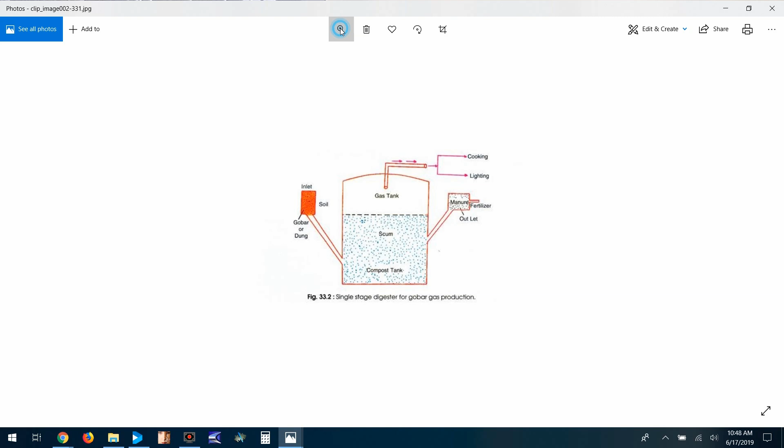All we're worried about here is the effluent that comes out of the toilet into the biodigester. So one of the things I did was, when researching, I was looking at how these things would go. Let's zoom this up a little bit.

So you see here we've got the inlet where all the little turds come down into the tank, and then they come out at this end, and you've got fertilizer at your outlet. Inside you have your composting tank, the scum, and the gas collected at the top - that's the methane.

The thing about this particular design with the single stage is that when this effluent goes into this pipe, it's pushed in, and once it gets moving it continues across this way. What happens here is this pipe is pushed out, and when everything is pushing out this way, it's drawing from the tank - so as it's pushing in here, it's pulling out here.

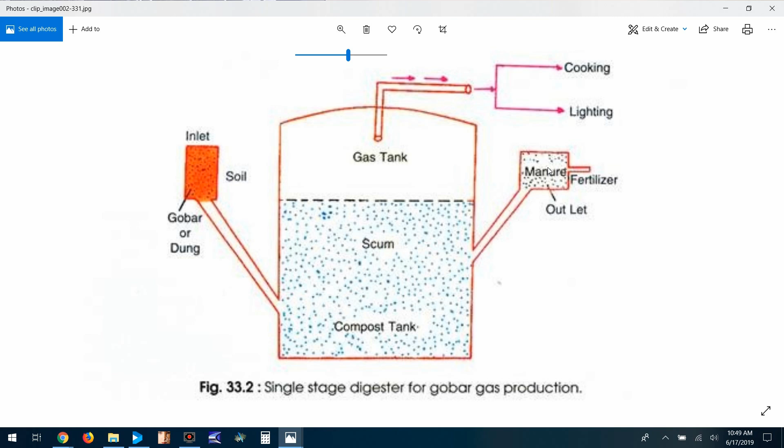The problem I have with this is that I think some not-completely-digested fecal matter could actually find its way to the end. Well, what they did to fix that in one design was...

Let me see if I can find it here - this guy right here. Okay, so this one has your inlet pipe that goes into the bottom, and then you have a baffle in the middle, this partition wall right here. So it has to go in, up, over, and then back down and out of this outlet pit.

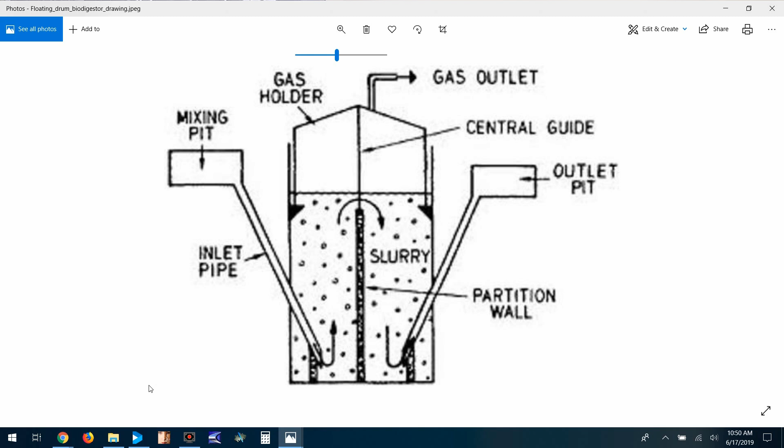So with this going on, there's not as much of a chance of the fecal material getting from the inlet to the outlet as directly as it would with the single stage biodigester.

Then there was another one they tried in this next set here - they've got this biodigester where the effluent goes in and comes out just like all the others, but then you have this stirrer that would either be operated manually or could have a motor up here that would just mix all this stuff up.

Well, you're mixing the old with the new, so in my opinion you could still have some of the new effluent - basically fresh turds coming straight out - into your outlet, and there could be some pathogens with that.

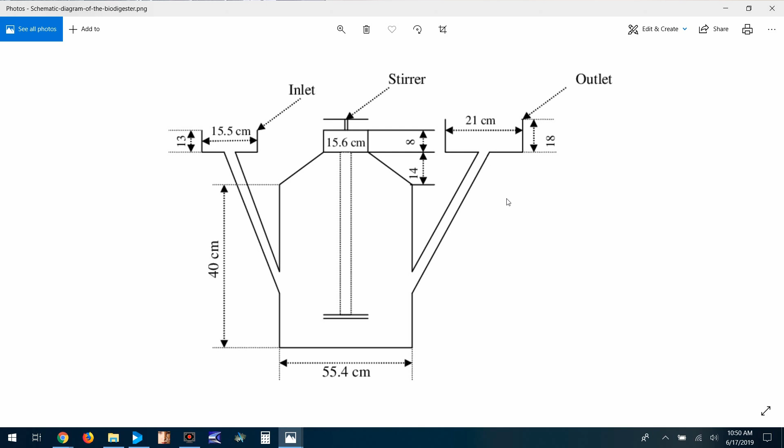I don't like that. And finally, we've got this last one here that I believe a municipality hired an engineering company to build. This, I think, was like a polyethylene kind of tank. They put it on a concrete pad with a heat exchanger that heated up all this effluent so it would make the gas faster.

So they would pour the manure into the reception pit, the pump would turn on and force it into this thing, and then they'd have these two little propellers on either side, which were mixers, and the effluent would come in here and just sort of swirl around and not necessarily make its way to the outlet of the tank.

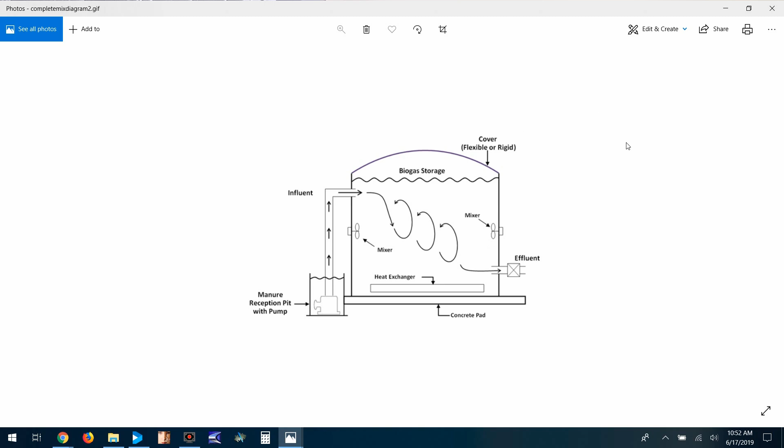Now, what I don't like about this either is it's using electricity for the pump and it's using electricity for the mixers, and when these mixers break down and have to be replaced or repaired, that I don't want to be the one climbing in the tank, and whoever does it's probably going to charge a lot of money. So I kind of just started moving away from that kind of thinking altogether.

So I got to thinking, you know, the human intestines is probably the best example of methane production, because you eat and all of that organic material, food as you want to call it, travels through your intestines, then our intestines extract the nutrients out of all of that food as it's passing through, and we generate methane gas, which is good old smelly farts, and then of course you have your effluent that exits out the end, but it's not completely digested because our body only needs to have it in the intestines long enough to pull the nutrients out. The goal is not to completely digest all that fecal material.

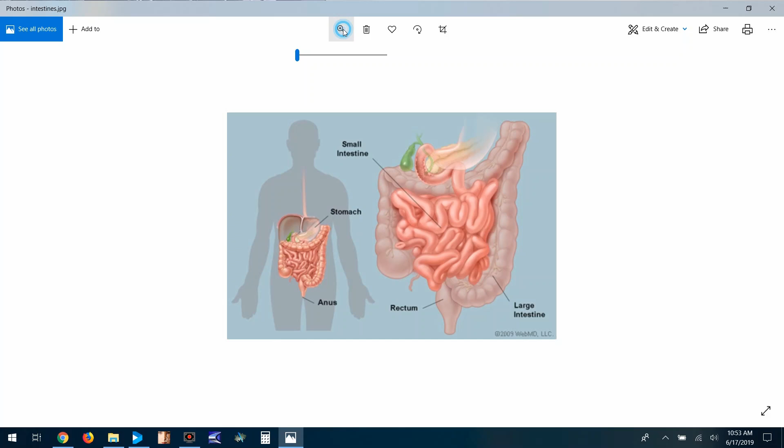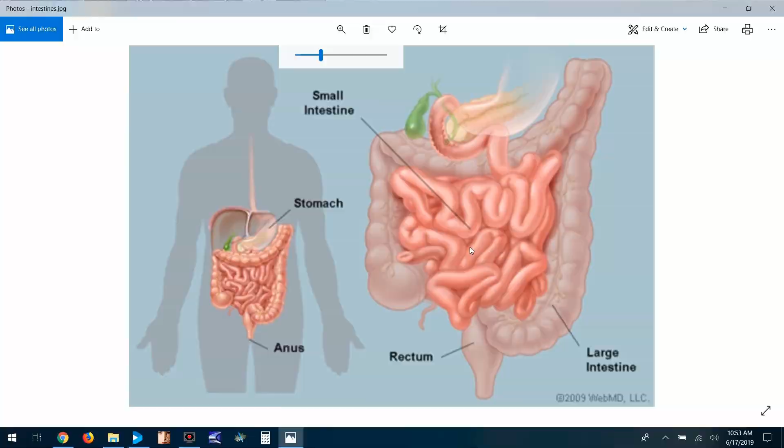So if we look at our intestines here, this is kind of what we have. We got the stomach, and it comes in and it goes through and just squiggles all around in all these different directions here, and then finally goes out the rectum. So it's a pretty efficient biodigester. It's just that the organic material doesn't stay in there long enough to get totally digested.

So I got to thinking, well, I could take some pipe and make basically an intestine that just sort of zigzags around on the ground there and let that fill up. So what I needed to do at this point was do a little bit of research.

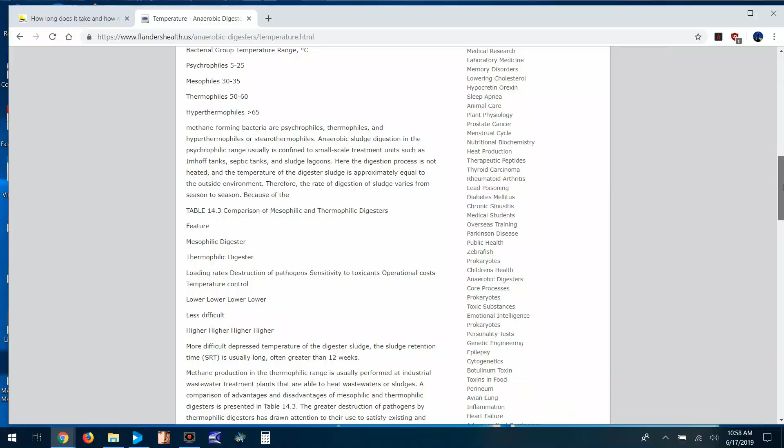So anyways, we're going to be looking at using the psychrophiles bacteria to process our waste into methane. So right here it says the more difficult depressed temperature of the biodigester sludge, the sludge retention time is usually long, often greater than 12 weeks.

Well, 12 weeks, that's, let's see here. We've got 1 gallon per day, so that's 7 gallons a week, and 7 times 12 is 84 gallons that my biodigester would need to hold to operate at a minimum of 12 weeks for 4 flushes.

Now, more realistically, we're probably going to be doing more like, I would guess, more like 3/4 of a gallon, probably closer to 3 flushes a day, because we really don't depress the pedal for very long to flush.

Okay, so I got this pipe volume calculator, and at first I thought I could probably do all this with 3-inch or maybe 4-inch pipe. But when I realized how much it was going to take of the 3-inch pipe, it was way outside the scope of reasonability. So I moved up to 4-inch, and it wasn't any better. I finally went to 6-inch because Home Depot sells the 6-inch pipe, and a 6-inch diameter, 10-foot long pipe will hold a little over 14.5 gallons.

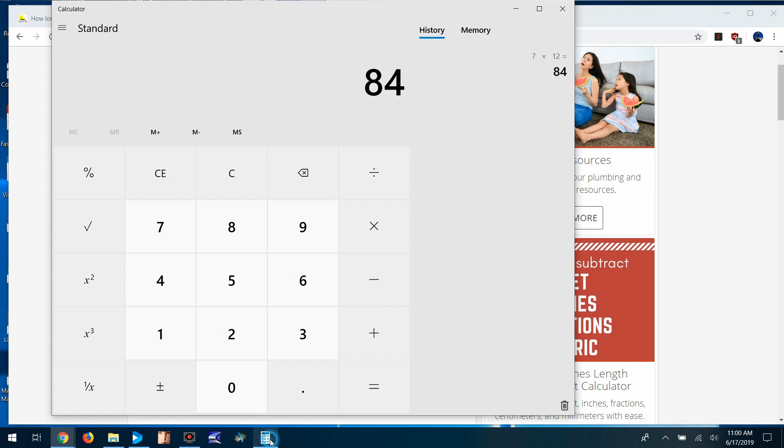So if I go back to my calculator, I can do 14.5 times, and I've got actually 11 sections of pipe out there, which is 160 gallons easy, because I've still got the elbows in it, the stack, and all this other stuff. So I'm easily at twice what I need in order to properly and fully digest fecal material.

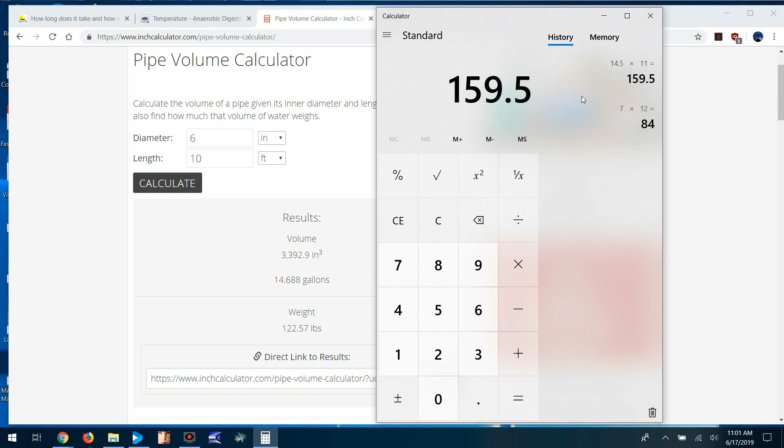There's a lot of other things that need to be taken into consideration with biodigesters, like if you fill them with too much water - if you do laundry or whatever and use it for all your sewage, you get what's called hydraulic saturation, or basically waterlogged. They like using these big words in these papers, but the simple man's term is it just gets waterlogged. There's so much water in there that everything gets so diluted it can't process well. My system is a lot more concentrated, with a lot less water and more of the fecal material actually in the piping of the biodigester.

Other things you have to take into consideration is the pH of the biodigester. You got to watch it a little bit because over time the biodigester will start to acidify, and you might have to add just a little touch of borax or baking soda or something like that. But as long as you keep it fed with other organic material like toilet paper, cuttings from the kitchen, any kitchen scraps - that kind of stuff all helps keep it balanced out a little bit.

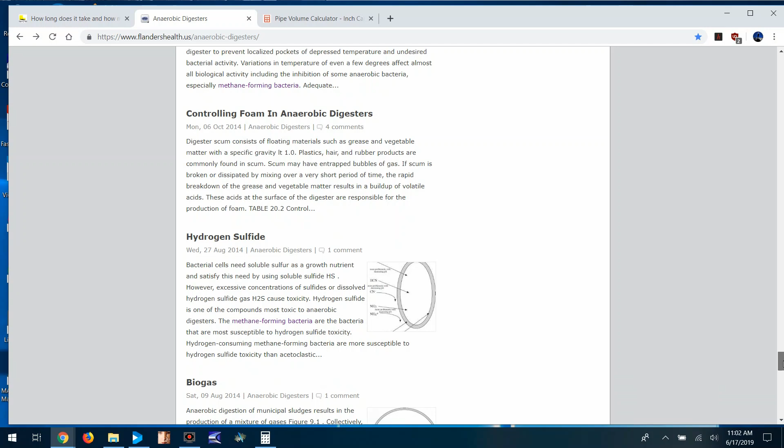Alkalinity - we kind of talked about that because urine breaks down into ammonia. Urine initially is rather acidic, but as it breaks down and turns into ammonia, that becomes more alkaline. So too much of anything kind of messes it up. You want to try to have a good balance of it all.

A lot of fatty acids - there's things that can be toxic to the bacteria in the biodigester. Here we are at retention times.

Let's see if I can find that again. So retention times in an anaerobic biodigester - you have solids retention time and hydraulic retention time. In this world, the solids and the hydraulic, or the solids and the water, should all be pretty well blended by the time it hits the other end, and it should be really good high quality fertilizer.

So you can see here that if you've got a high powered biodigester, you can run your effluent through there in about 12 days, where in my case it's going to be more like 12 weeks. You want to be careful about washout and too much waterlogging, that kind of stuff. Shouldn't have that problem with mine.

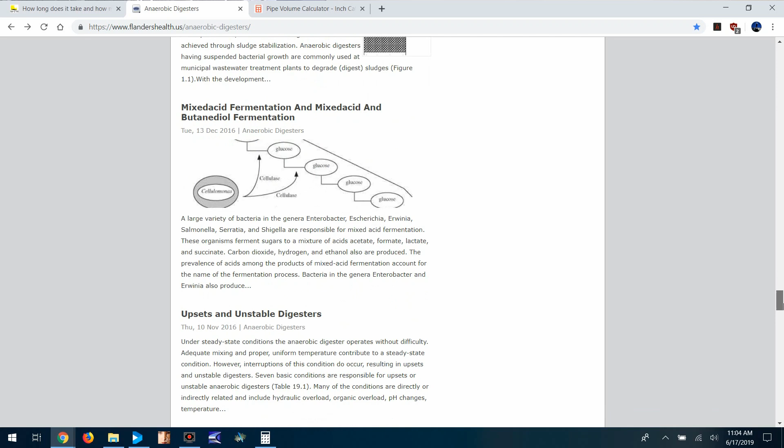Here we've got upsets and unstable digesters and how to deal with those. So a lot of really good information in this article, and it's very in-depth. I could sit here and read it all to you and go through each detail, but most people are going to get bored with all the details. So that's the reason I'm just hitting on the things that I feel are important to my installation. Although all of it is important, I just have to be careful about how I present it so it's not so boring that nobody's going to watch.

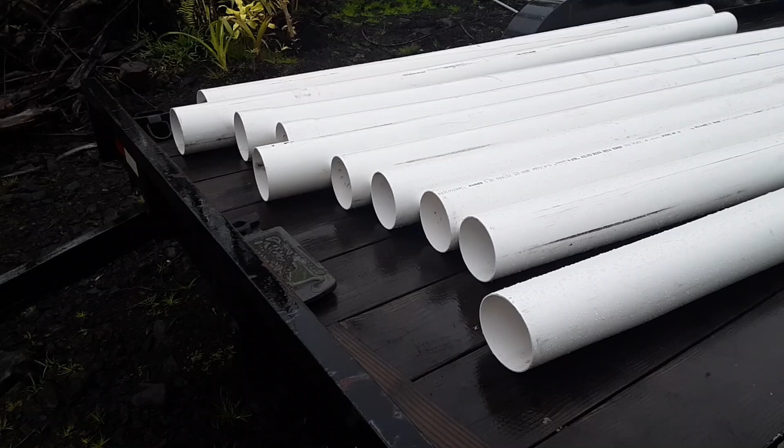Alright, so I have 1, 2, 3, 4, 5, 6, 7, 8, 9, 10 6-inch PVC pipes that are going to make up the components of my linear biodigester. And it's not going to be just pipes - there'll be a lot of fittings that make it up. And then I've got this spot right here.

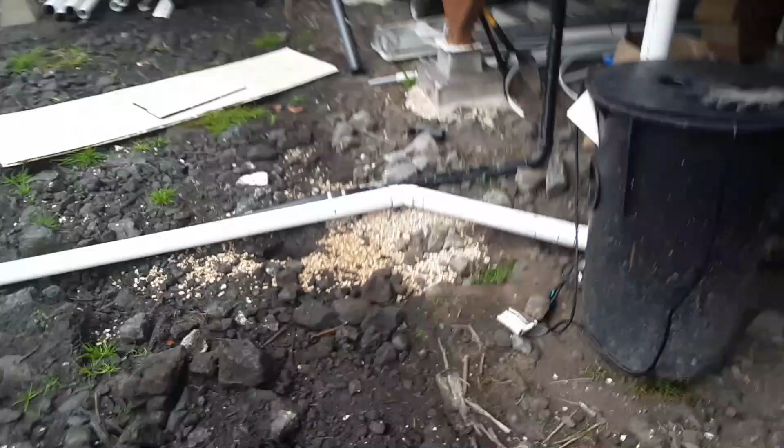The white pipe on the ground here is going to be the effluent that goes into the biodigester. The black pipe to the right of it is simply gray water from the shower and the bathroom sink, and it goes down there. At the bottom, all along there is where I'm going to wind that white pipe back and forth until I've gotten all that pipe used up. So the effluent will come in at this end, flow down and work its way around, and finally end up at those banana trees over there as fertilizer.

And then I'm going to collect the gas up here closer to this area, and the gas I'll put into a storage bag that will have the gas stored in it.

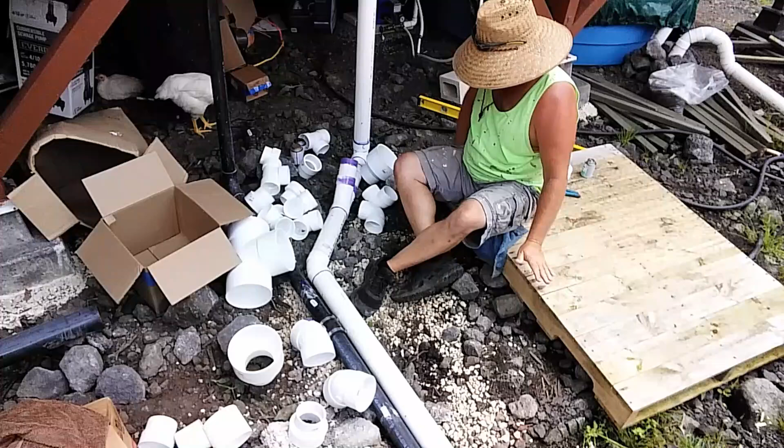Okay, this is the soil stack that goes directly from the toilet down through the pipe all the way to the biodigester. From here, the gases from the biodigester will travel up the top side of the pipe all the way up here, and it'll pass into this pipe, which is the collection point of the methane gas.

I've got it stubbed out here. I'm going to come up with another pipe and some adapters into smaller pipes, and we'll collect all of it into that, and then we'll use that for running our clothes dryer initially, if it works well for that. So we've got all of this set up and ready to go. Now it's time to run the biodigester.

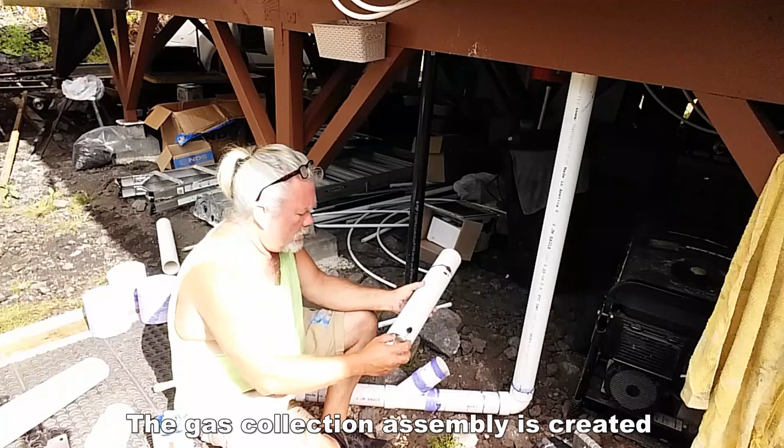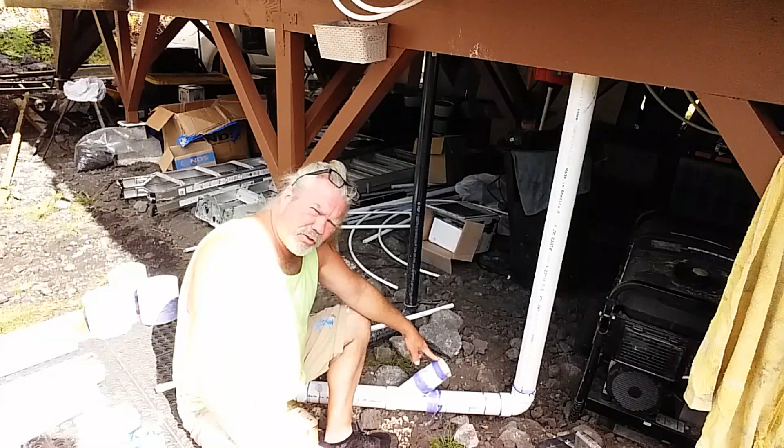So I'm working on the gas collection port, I guess you could call it. This is the port that the gas will come out of the biodigester. I'm going to reduce this 3-inch pipe down to a 1/2-inch pipe, and the gas will collect through that 1/2-inch pipe, and it's going to be very low pressure, very close to atmospheric pressure. There's not even going to be 1 psi. It'll just go into a collection bag of some sort eventually, and I'll probably put it inside a wooden box so that the cats don't get to it and claw holes in it. And that's what I'm going to work on at this point.

So I'm happy to have you with me, even as bright as this sun is. It's a great sunny day.

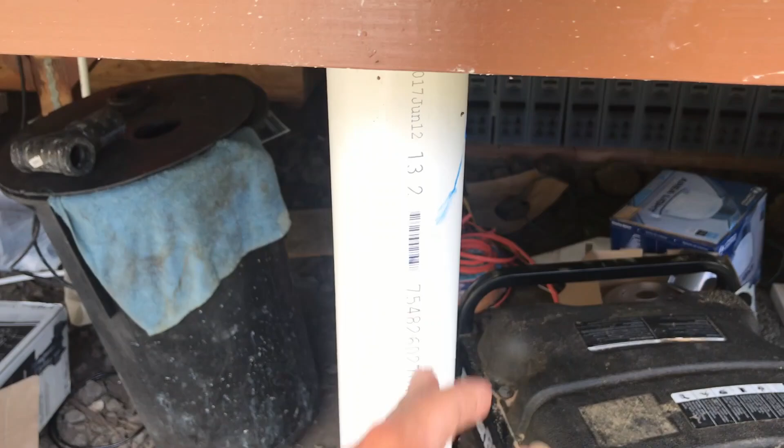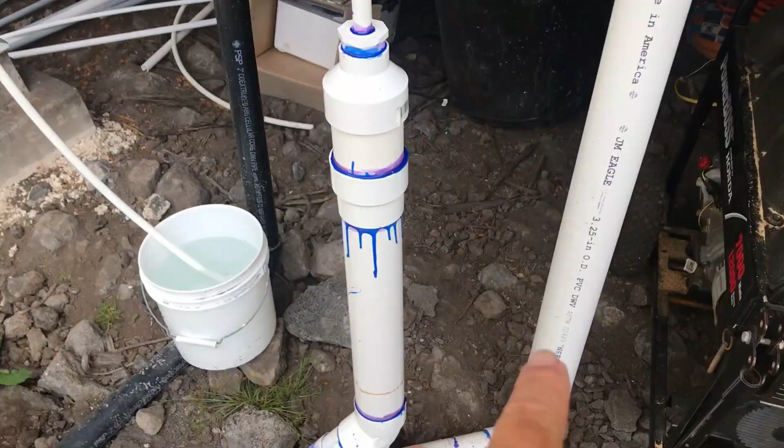And it starts here. This pipe is the one that goes directly from the toilet, so it feeds directly into the system and goes out. And it's got a very slight angle. It's got that one right there that goes straight down, but the rest of it is just a very gradual slope. Even out there where it winds back and forth, it's a very gradual slope. So that way, when you flush the toilet and everything goes down, it forces all the other material that's in front of it out.

I'll go down and explain all that in a minute. And then this here is the methane capturing stack. This is where the methane is captured out of the system. So as it's digested down there, the bubbles rise up to the top, make their way back up this pipe, all the way up here. And then it's captured in this Y right here.

And then it's brought right out, and it goes into that PEX pipe. Right now that PEX pipe is just going into a bucket of water, and that's to isolate this system from the oxygen in the air. That allows the methane bacteria to start growing.

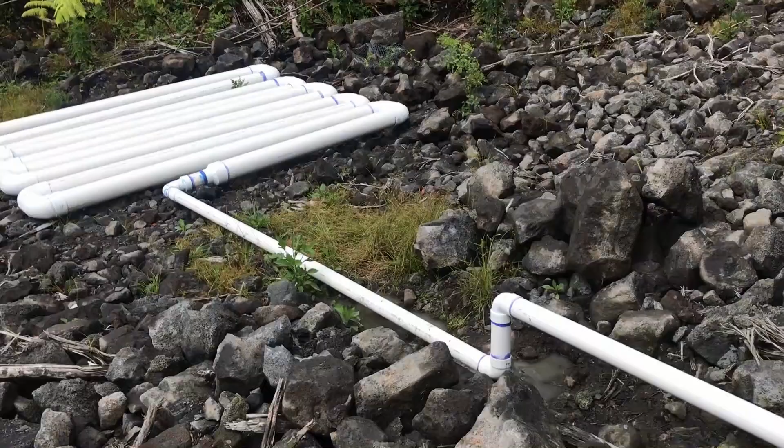Alright, now we'll take a walk down here and we'll look at all of this a little bit more closely.

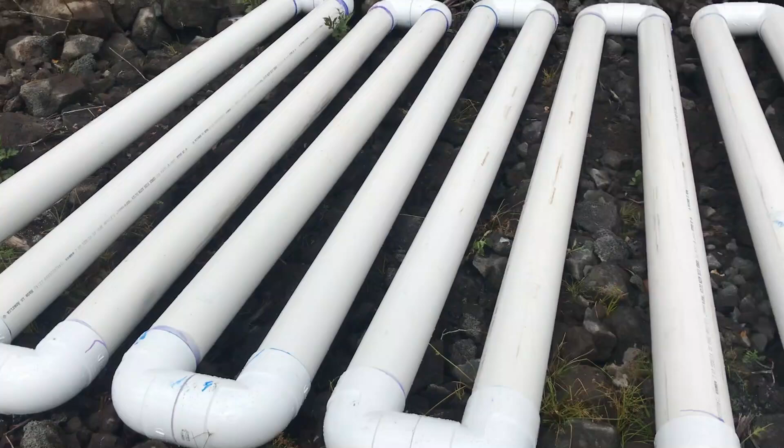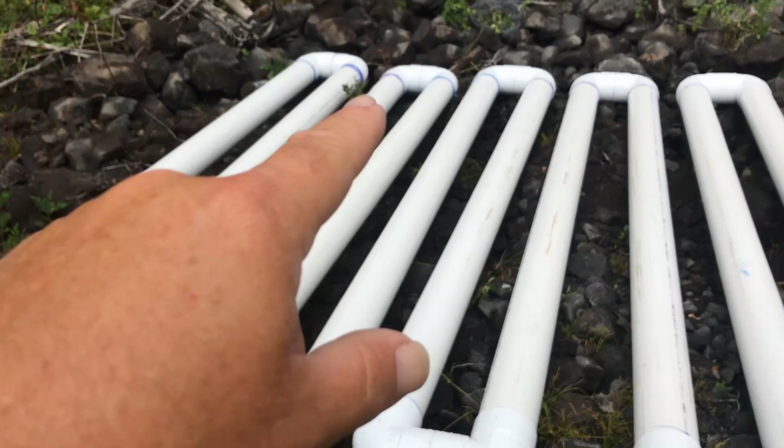Alright, so now you can see the pipe here. I've got to raise that one up right over there, that one loop. It's a little bit below the others, but it's coming up, and then this, so you can see that it goes in here, goes into the 6-inch pipe, makes its way around, all the way around. That's what makes this a linear biodigester. Nothing comes out the end until it's gone all the way through all of that pipe. And then at the very bottom right here, it's got an elbow.

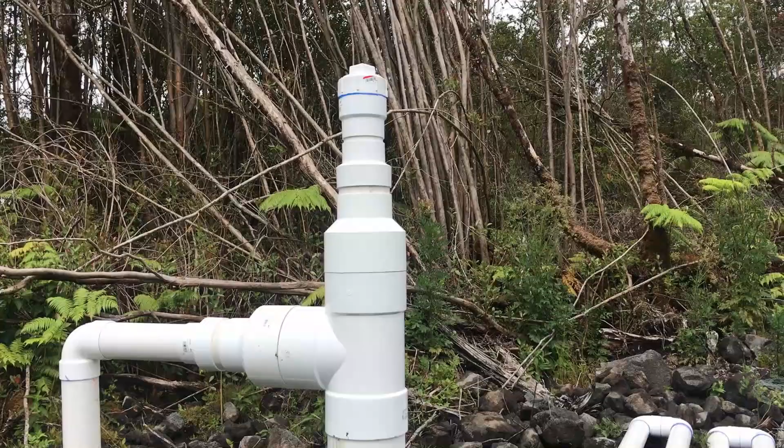And then the sludge that's at the bottom is forced up, out, and over. And then it comes across here and feeds the banana trees. And that's supposedly a really high quality fertilizer. The plug up on top is so if I ever have to inspect it or pump it out, I can take that off. Hopefully I'll never have to have it pumped out, but if I do, I've got a way to do it. So that's the completed system finally.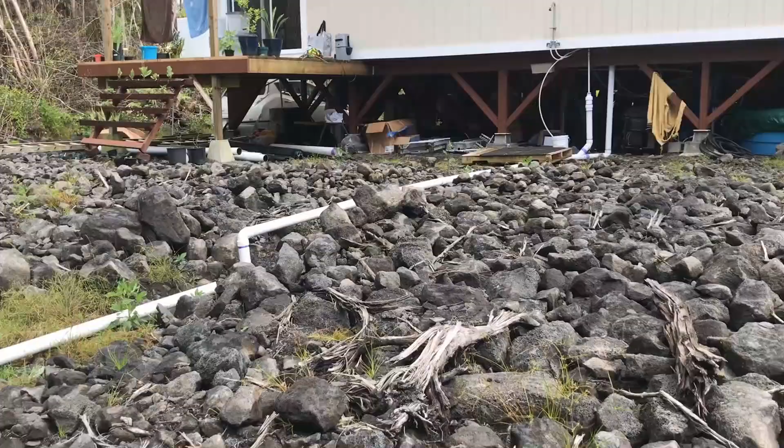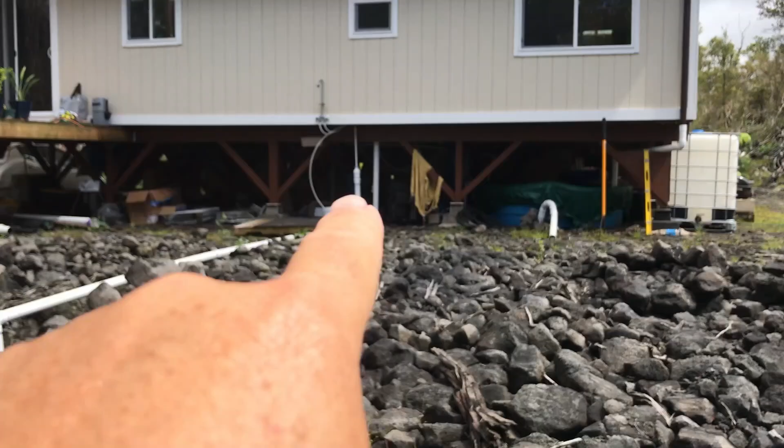Now the reason that this stack right here is as tall as it is, that's about probably 5 feet from the ground here up to the tee. And the reason for that is I want it to be right at the same level as that gas pipe where the first fitting meets. And that way the liquid and all of the pipe is in there all the way across. And the liquid that's in the pipe, all the slurry, is what actually seals the system and keeps it from getting to the oxygen in the air.

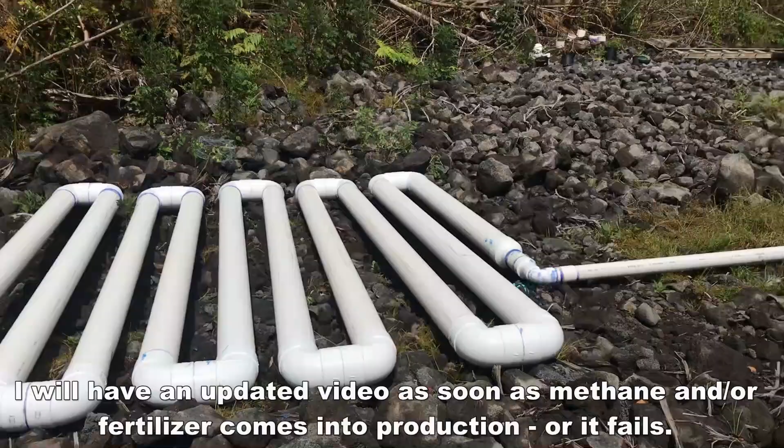So now I've just got to fill it all up with water and start crapping a lot, and then I should have some methane here in about 15 weeks if my calculations are right.